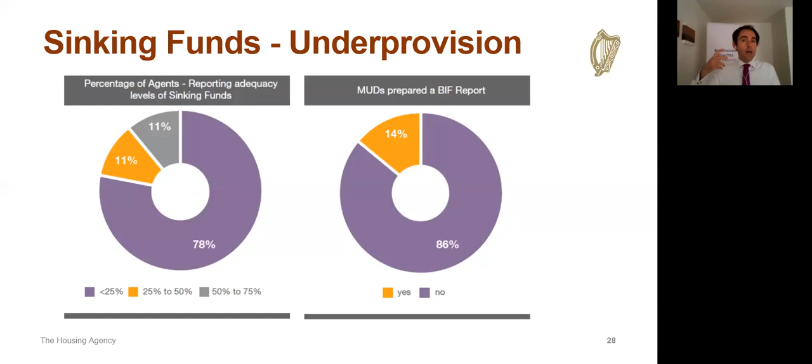What it drew out is that 86% of the multi-unit developments surveyed had not prepared a building investment or sinking fund report. So really, they're in the dark as to the future costs of their development in terms of lifts, plant and machinery, roofs and so on. Worth thinking about that, I suppose.

From the Housing Agency's point of view, we have a lot of resources to support OMCs and multi-unit developments on our website, and we'd invite you to look at that and visit previous webinars. They cover the financial side, corporate governance side, and training and information for all stakeholders in the sector. It is now a year since our report on owners management companies, and we'd invite you, if you haven't seen it, to check it out on our website. We've undertaken some writing on the sector.

We will be producing later this week some guidance for owners management companies and multi-unit developments on the COVID situation - some suggestions, ideas, and guides for stakeholders in the sector. We're very grateful for the collaboration of the Society of Chartered Surveyors Ireland and the Institute of Professional Auctioneers and Valuers Ireland on that.

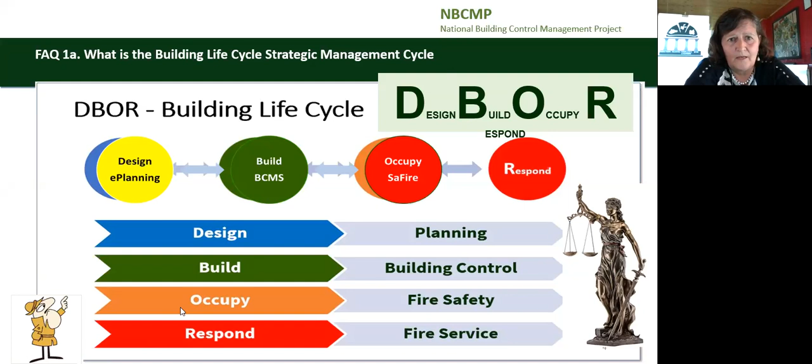The provision of affordable and adequate housing is a key priority for all governments. Sustainable housing requires that the physical, social, cultural, environmental, climate change, and economic facets, and the use and reuse over time of housing, are addressed in an integrated policy.

The barriers to reuse of existing housing include a perception of increased maintenance costs, building regulations, and the inherent risk and uncertainty associated with older building stock. Addressing buildings' adaptive reuse significantly reduces whole life costs, waste, and leads to improved building functionality.

The Department of Housing, Planning and Local Government's manual outlines the approach to the design and methodology for bringing back homes, and it's a very useful guide to assist in the redesign and reuse of town centre buildings. I would highly recommend it.

The purpose of building regulations, in the next slide, in a civilized society, is for the health and safety of the citizen and the protection of the environment.

This slide is a visual representation of the building legislative framework in which building control officers work and operate. The legislation encompasses a holistic approach to provide for safe, accessible, durable, and sustainable buildings where occupants can be assured of a proper supply of air, light, thermal comfort, and water.

The design and construction of buildings in Ireland is regulated under the Building Control Acts 1990 to 2014. The 1990 Act provides for, amongst other things, the making of building regulations, which are the design requirements of buildings, and the making of building control regulations, which are for administration and ensuring compliance with the building regulations.

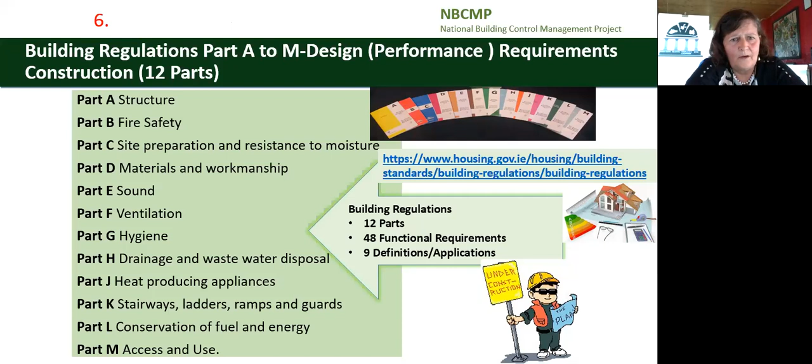It is important to note that the responsibility for compliance with the building regulations rests with the designers who design, build, and the builders who construct, and the owners who normally start the process. So all works must be designed and constructed in compliance with the building regulations. Now a quick run through the building regulations.

Part A: a building must be designed and constructed on proper foundations so that it doesn't crack, move, or fall down. Building elements must be designed to resist large forces of loading, such as people, machines, accidents, earthquakes, rain, snow, for its lifetime, and that also includes balconies.

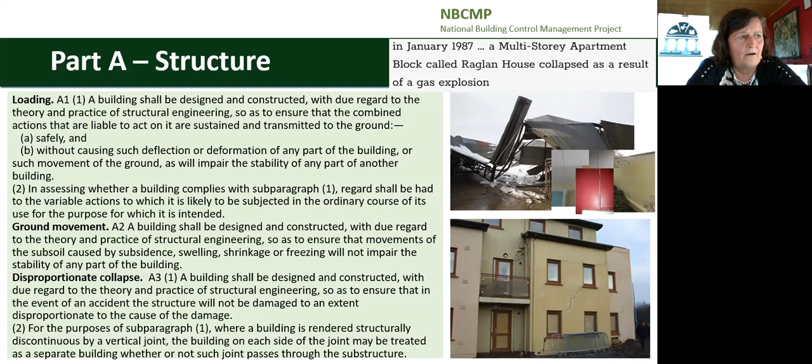Part B is fire, and buildings must have fire detection and alarm systems, a safe place of refuge for people to escape, walls with resistance to fire spread and access for fire brigade. Multi-units should have fire doors which must be kept closed, and a fire should be contained in a room or the unit where it started for a specified period to allow people to escape.

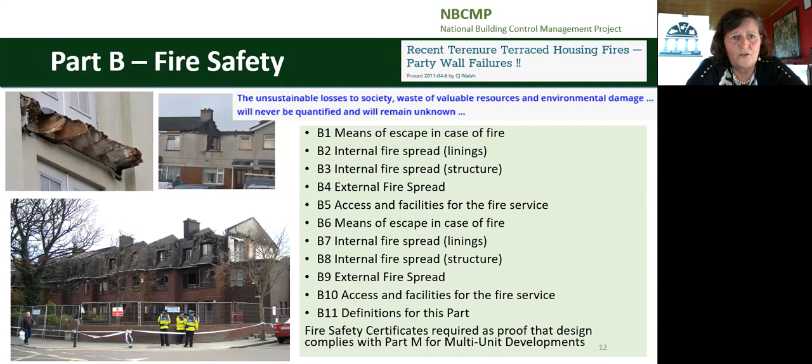Part C, site preparation and resistance to moisture. We must build on a clean site free from contaminants, such as radon. The floors, the walls, the roof must be weather resistant and prevent the passage of moisture to the inside of the building.

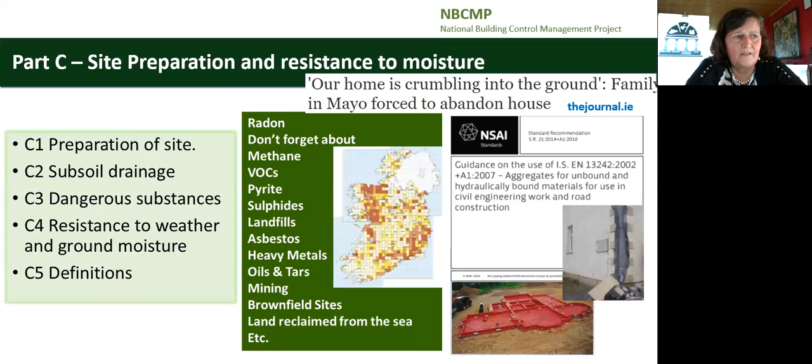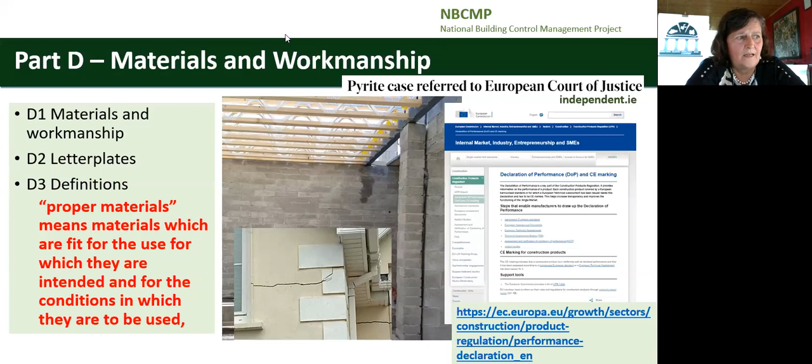Part D, very important part, materials and workmanship. Buildings must be built in a workmanlike manner with proper materials which are fit for the use for which they are intended and for the conditions in which they are to be used. Materials fit for use in Scandinavia or Poland may not be fit for use here due to the different climatic conditions. Likewise, materials used in inland conditions may not be suitable for use in coastal or exposed regions of this country. Construction materials should be properly CE marked and have a declaration of performance.

Part E, sound. Walls and floors must have a reasonable resistance to airborne and impact sound. In multi-units, it's very important to get this correct. You should not be able to hear your neighbours. For new multi-units, sound insulation performance tests carried out by certified testers should be available, and the type of floor coverings permitted is also very important here.

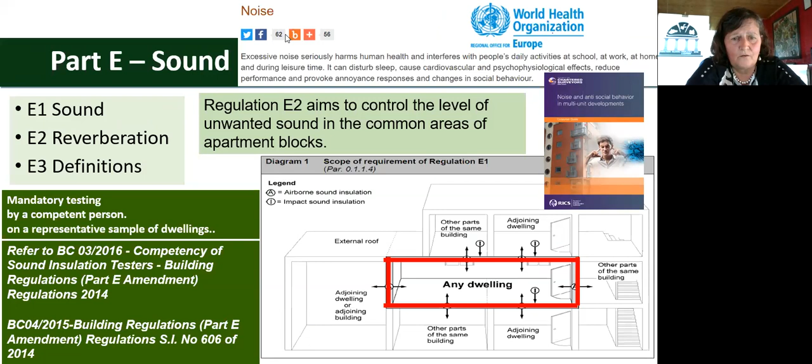Part F is ventilation, and ventilation must be provided for people in buildings, which limits the moisture content of the air to prevent condensation and mold growth. Proper supply of clean air into the building while expelling the stale air.

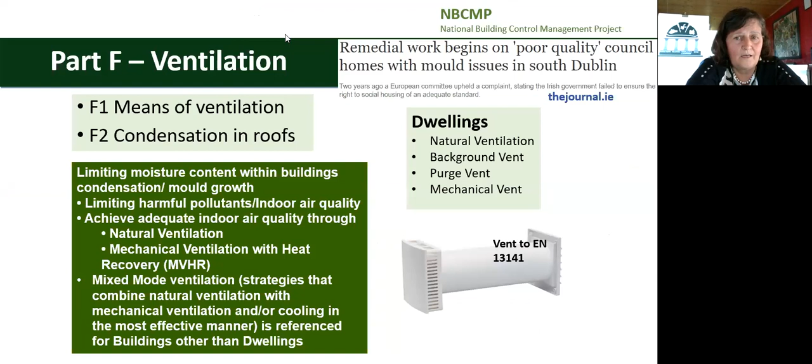Part G refers to hygiene. A building must have a bathroom, hot and cold water with properly insulated storage and service pipes.

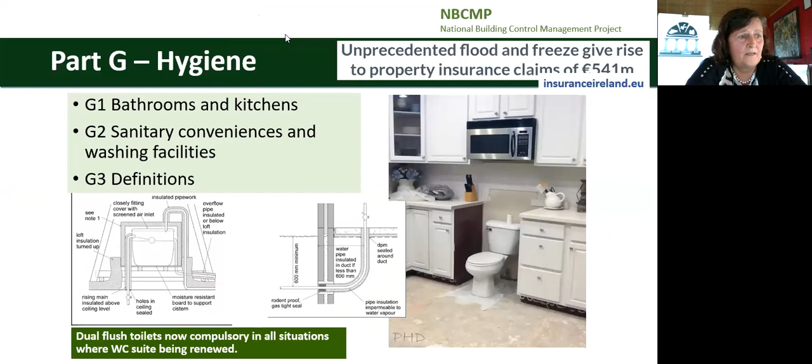Part H, drainage and wastewater disposal, provides for the separate drainage for foul and surface water that doesn't cause a safety or pollution risk. The treatment system design must provide that its function to a sufficient standard for the protection of health in the event of a system failure.

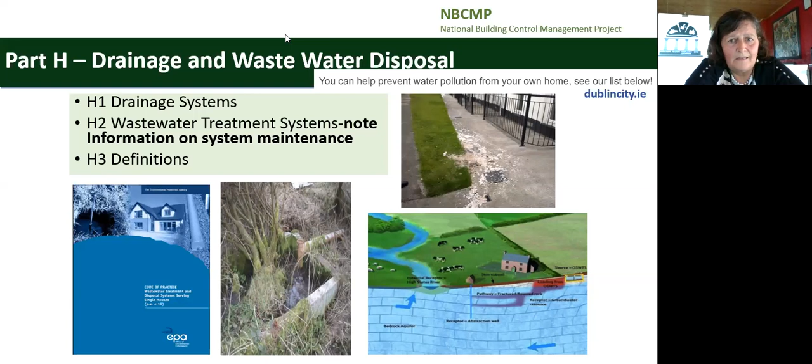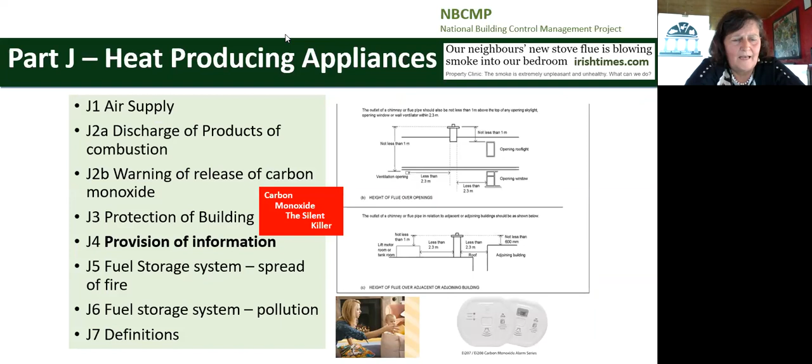Part J, heat producing appliances, provides for the safe discharge of combustion products via flues or chimneys, and oil storage areas must be safely located and bunded. Part J also provides for carbon monoxide alarms and detection systems. A durable notice with operation and maintenance information must be fixed on or near all new replacement hearths, fireplaces, flues or chimneys.

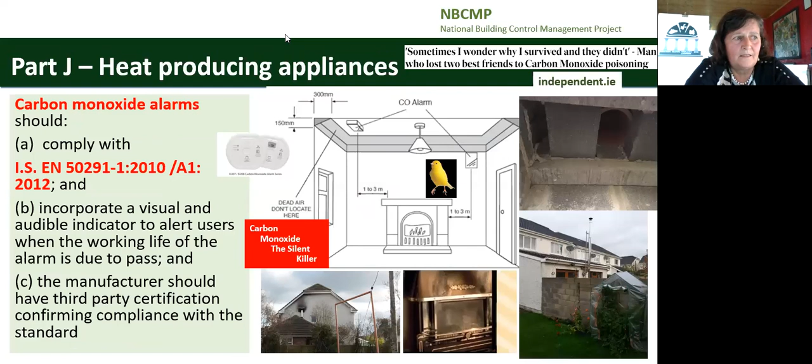Part K, stairways, ladders and ramps. Building users must have a safe passage with guards on floors, balconies, roofs and vehicle ramps to provide for protection from falling as well as falling objects.

Part L relates to conservation of fuel and energy, and it provides for nearly zero energy buildings. That is, energy efficient buildings by limiting the energy required for the building operation and associated carbon dioxide emissions. So it limits heat loss from the buildings and ensures heat gains from renewables. 30 years ago, insulation was considered a luxury. Now it's an absolute necessity and a requirement to mitigate against the negative effects of climate change and ensure affordable thermal comfort in our buildings.

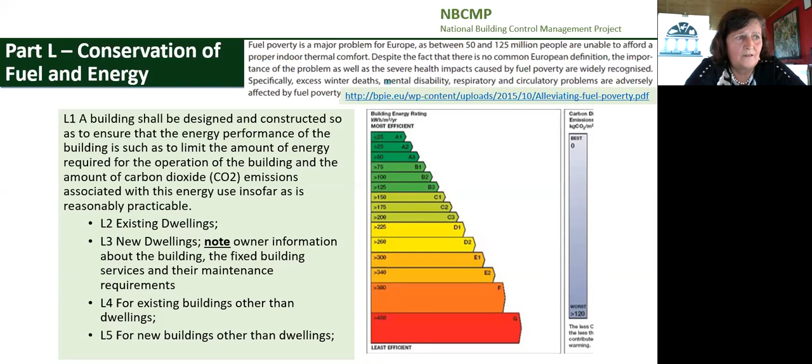Fuel poverty is a serious issue across the whole of Europe. Part M is access and use, and it's really an equality measure and ensures people can access and use a building and its facilities and its environs, extensions, including its sanitary facilities. So that's parts A to M.

Construction products should be clearly marked and have a declaration. A building actually for sale or letting must have a building energy rating. So all buildings must have a building energy rating, and public buildings should have a form of display energy certificate.

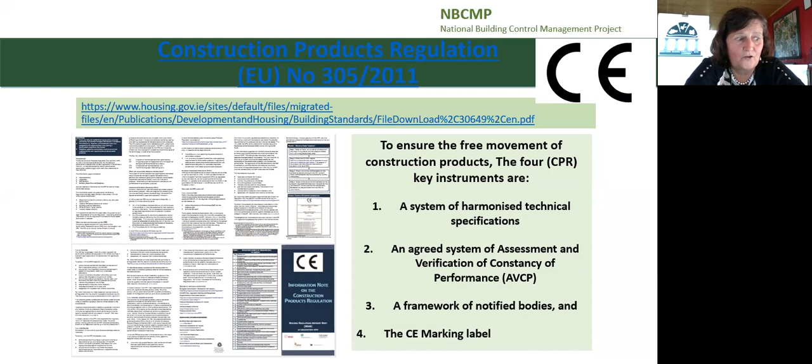Construction products should be clearly CE marked and have a declaration of performance drawn up by the manufacturer. For multi-units, it's recommended that a complete categorized schedule of all building products should be available with their CE markings, declaration of performance, certification, and test results. For example, this should be available for every brick, block, insulation, roof material, vent, fire door, railing, window, cladding, intumescent paint, etc.

So on our next slide, we hear a lot of discussion in the media and elsewhere regarding the costs of compliance with building regulations. But we do have to remember that the purpose of the regulations is to ensure health, safety, and welfare of people in or about buildings, conservation of fuel and energy, and access for all. So I would ask the question: which part from A to M that we have looked at can we afford to relax or dispense with when we build our multi-units or any building?

We do have these buildings for 60 plus years. So sustainable urban housing design standards for new apartment buildings require a life cycle report to be included as part of the planning application, to ensure certainty regarding the effective and appropriately resourced short and long-term maintenance and running costs. It also requires that conditions must include compliance with the MUDS Act, establishment of an owner management company, and establishment and maintenance of a sinking fund for ongoing maintenance and renewal.

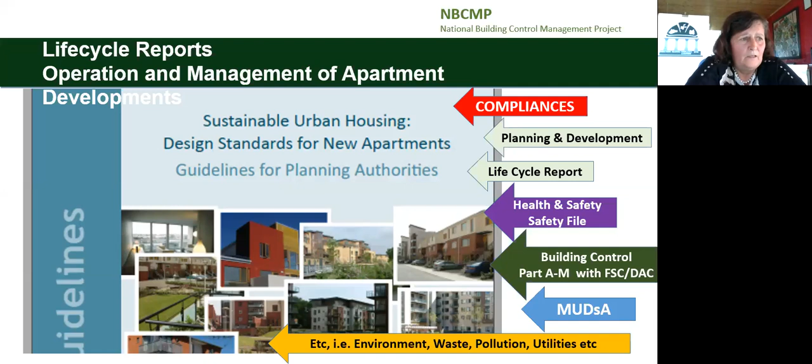So those who produce life cycle reports need to be clear on what is meant by lifespan, and differentiate between design life, estimated design life, service life, predicted service life, and estimated service life, in the context of the durability of construction products. Many of these life cycle reports that I've read use the term life expectancy with high-level statements that don't really have sufficient detail to assess long-term running and maintenance costs.

Also, as so many variables change during construction and from the time difference between planning and occupation, the life cycle report should really be a preliminary life cycle report at planning, with the final life cycle report forming part of the Planning and MUDS Act compliances.

Schedule 3 of the MUDS Act lists the documentation to be handed over to the owner management company, which includes compliance with the relevant planning permissions, building regulations, design and building control regulations, the paperwork - that's the commencement notices, the proper certificates of compliance on completion, disability access certificates, and fire safety certificates.

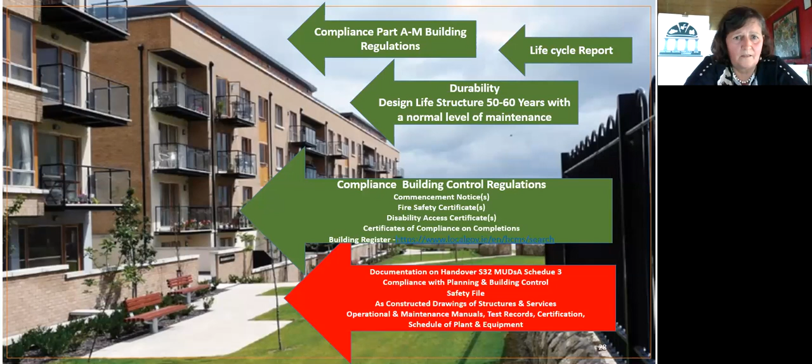You must hand over the safety file, as-constructed drawings of structures and services, operational and maintenance manuals, warranties and guarantees, test records for drainage, water and heating systems, a schedule of plant equipment and fire protection systems specifying the expected useful life of such plant equipment and systems. And it would be very interesting to just look at the complete record for each multi-unit that is handed over.

So in the preparation of life cycle reports, the design life of the building should be defined in the initial brief, and this should reflect the overall development requirement. Design life categories for building products or elements should be clearly specified with effects of failure and consequences of failure on the building itself and on the occupants. So a time frame really for repair or replacement, including occupant disturbance.

For example, repairing a flat roof after 15 years of service - will the building have to be surrounded in scaffolding, and for how long? A lift out of order in a 3-story building has less severe consequences than a lift out of order in a 7-story building. So the design life or reference service life of all asset components should be specified in years and categorized with all of their associated compliances.

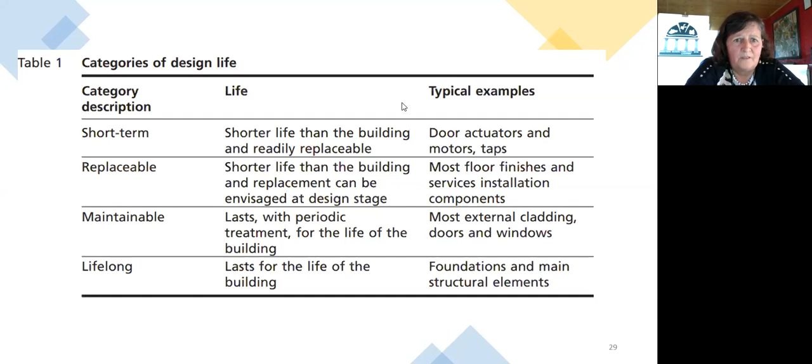It is important that competent persons are involved in the design, construction and maintenance. A competent person is one having sufficient training, experience and knowledge appropriate to the nature of the work to be undertaken. Competent is defined under the building control regulations, and it's quite a useful definition.

The quality of our built environment on health outcomes of people is well researched. People spend more than 90% of their lives indoors. We should note that the vulnerable - babies, the sick, elderly, poor, unemployed, and all of us during COVID-19 - spend up to 98% of our lives indoors. So many health problems are either directly or indirectly related to the building itself. It's very important that buildings are fit for purpose, constructed with proper materials, fit for the intended use and the conditions and location they are in.

Building regulations provide for the health, safety and welfare of people in or about buildings, conservation of fuel and energy, and access for people with disabilities. For multi-unit developments, compliance with Part A to Part M of the building regulations should be available, and it should be absolutely mandatory as part of the documentation.

We must remember that when we build today, we will not only have consequences for this generation, but the next, and probably the next generation after that. Therefore, we must put people first by ensuring proper planning and sustainable development, providing for a quality built environment where people can live, work and play. This really does require a very serious commitment to life cycle design, and a serious commitment to ensuring full compliance with planning, building control and the MUDS Act for all apartments and multi-units.